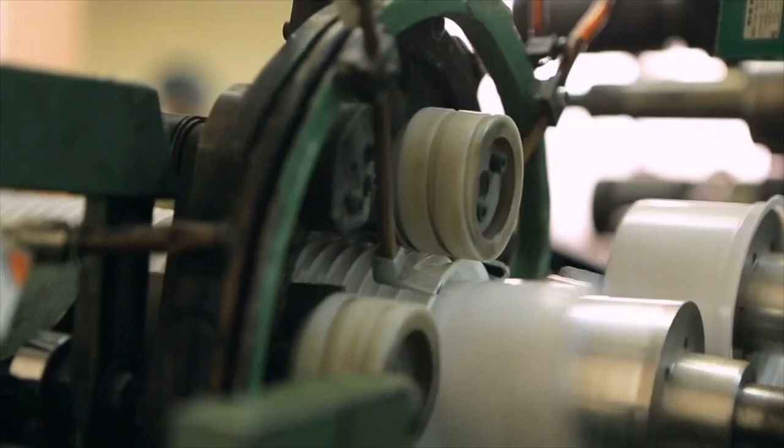Automation is used by 76% of businesses today to increase productivity and efficiency on a large scale. But automation is a two-sided coin with even darker negatives.

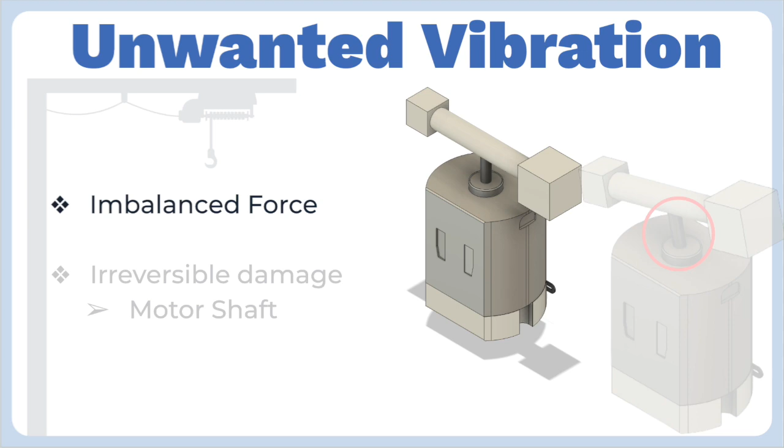The leading cause of unwanted vibration results from an imbalanced force acting upon the object. In automation, an imbalanced force on the motor can lead to irreversible damage as the motor shaft tries to compensate. To solve this problem, companies use vibration dampers.

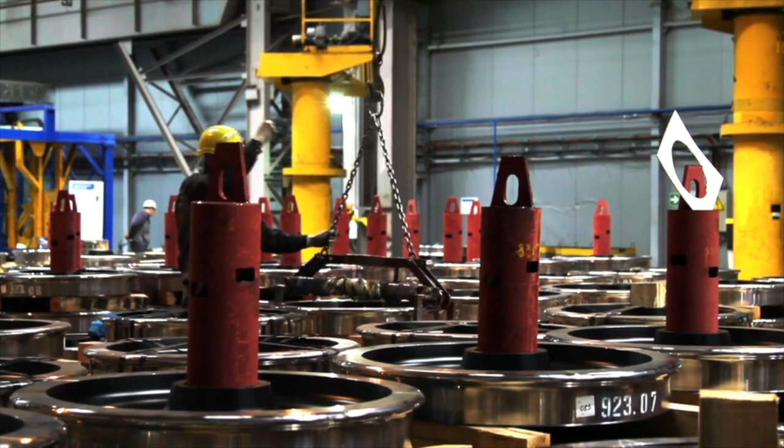The problem with dampers today is that cheap rubberized dampers can contain harmful chemicals called phthalates, which can have many adverse side effects if ingested, cancer being one of them.

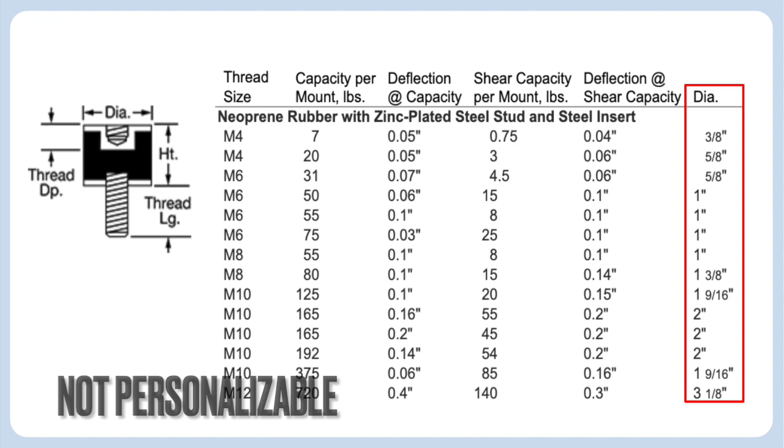These dampers are also set to only specific sizes, which can make them unavailable to certain machines. Lastly, these dampers must be shipped from the manufacturer to the company across long distances, which can cause a delay in product output and can cost more due to shipping.

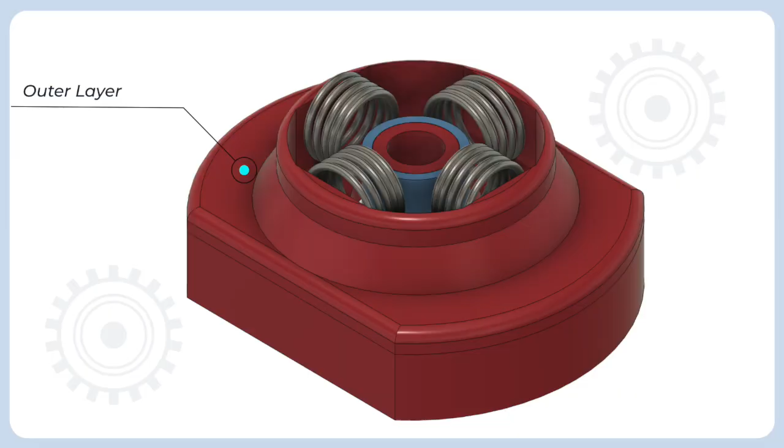The first outer layer comprises high-density 3D printed materials firmly attached to the outside of the motor or machine, giving a baseline for the springs to push off of. Speaking of springs, the next part of the damper is composed of springs with a higher spring constant, leading to stiffer springs and less vibration.

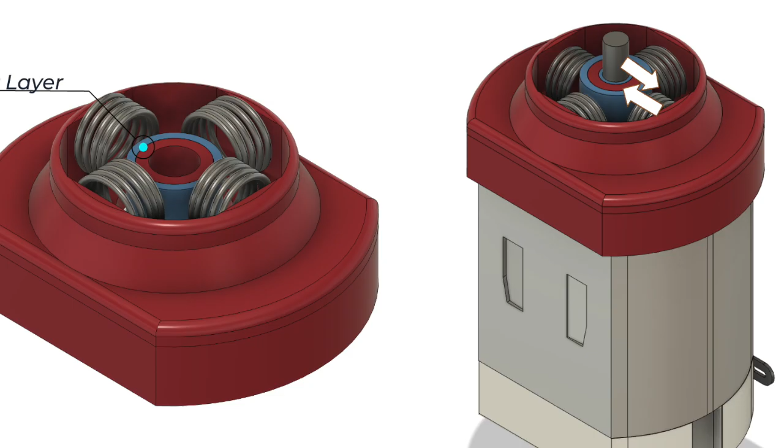As the inner layer, which goes around the shaft of the motor, is hit by the shaft via unwanted vibration, the springs push back on the inner layer, reverberating the shaft back to its original position.

To buy a DuraDamp damper, first, go to the DuraDamp website to send an STL file of your machine setup. Second, once it is sent, our Dura developers work diligently to send back an STL file of your damper in less than an hour. Third, pay the invoice, print the pieces with your 3D printer, and attach your recommended springs onto the damper.

Note that we work with local 3D printing and spring making businesses in your area to minimize shipping costs and times. Our product lifecycle does not just stop there.

Broken dampers can be sent back, melted, and turned into another damper for machine use. This allows the Dura damper to decrease pollution and increase product output, something all companies genuinely want.

Our novel DuraDamp timeline uses existing technology to produce the product at a manufacturing cost of $0, enabling us to sell these dampers cheaper than our competitors, making money off of every damper created, and being able to reinvest this money back into the business.

In the about $500 million current damping industry, there are tiers of customers and non-customers that DuraDamp taps into. First, we have the soon-to-be non-customers, businesses or individuals currently exploring the vibration damping solutions, or those looking for cost-effectiveness or ease of installation of modern dampers.

Next are the refusing customers, industries or applications where vibration damping is not a priority or considered unnecessary for their operations. Lastly is the unexplored territory, or emerging industries or niche markets where vibration damping solutions are not used but could offer benefits. By focusing on the problems that non-customers have, DuraDamp is able to achieve access to a greater than $1 billion market.

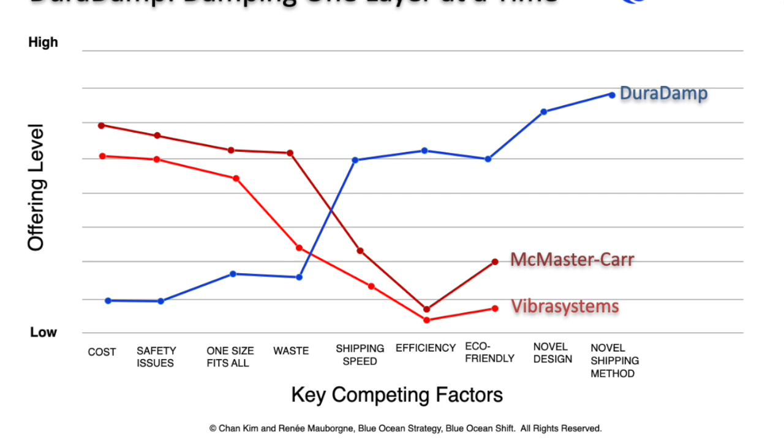Our focus on cost reduction and innovation sets us apart from traditional players, ensuring sustained market dominance. The strategy canvas shows that our Blue Ocean offering is better than the current industry focus, eliminating the risk of using and maintaining current dampers and increasing simplicity, productivity, and more.

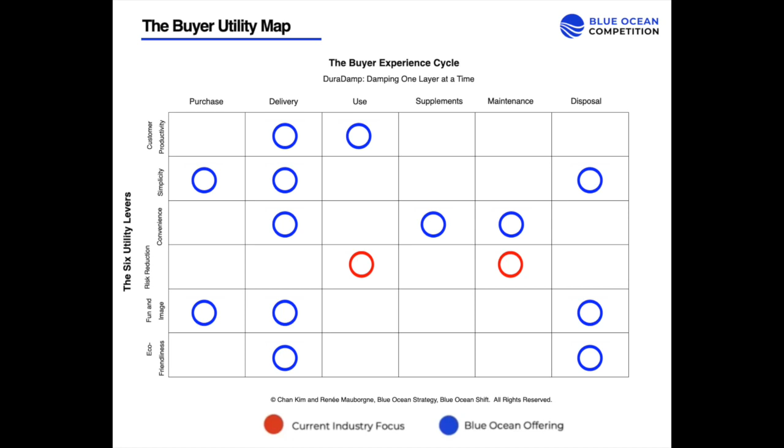So far, we have completed research on the novel design at the micro level. Over 30 different test cases were run with varying levels of imbalance, and we are proud to say that the prototype dampened 42.08% of vibrations compared to its undamped counterpart.

The next step for DuraDamp is to file a patent on this novel design.

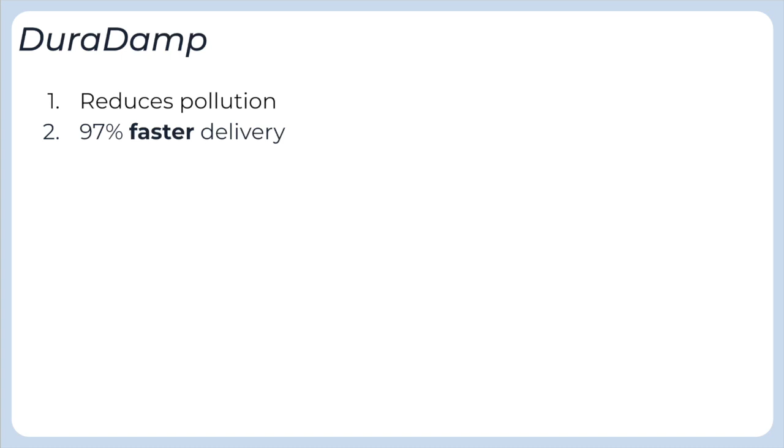To recap, DuraDamp reduces pollution and gives companies personalized dampers up to 97% faster than conventional shipping procedures. The use of STL files enables DuraDamp to reduce costs dramatically.

For instance, our prototypes cost nothing on our end to create, compared to modern dampers, which can cost up to $35 to $40 per damper.

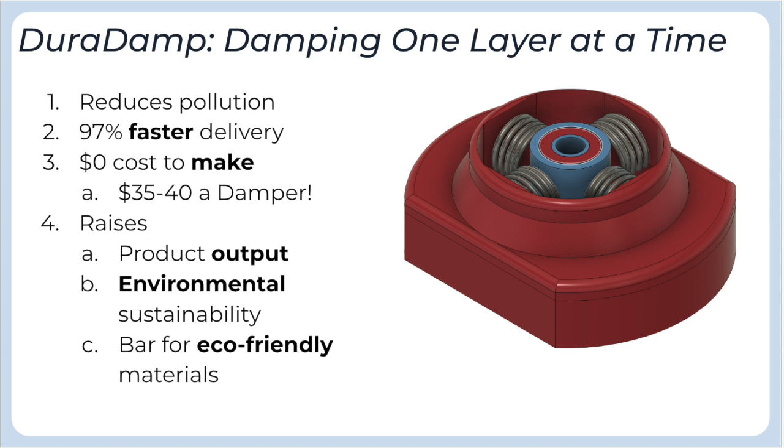DuraDamp raises companies' overall product output by allowing them to create dampers when needed and not worry if they run out of dampers. It also raises the importance of environmental sustainability and the bar for using eco-friendly materials.

Our commitment to environmental sustainability, cost-effectiveness, and operational excellence redefines industry standards.